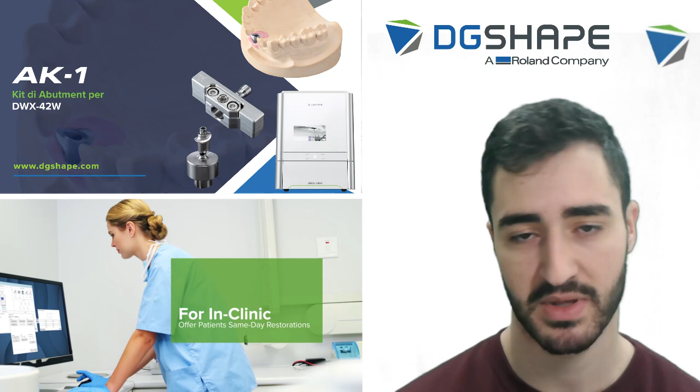Today we're going to talk about the AK1 adapter for Roland 42W, and in the future days, future months, we will show you some new webinars about small tips, about digital workflow, about the milling machines, software like Exocad or Millbox. We will show you some new protocols, new daily basis about digital workflow. Today we start AK1 for 42W, but in the future we'll show some new different videos about all the different kinds of aspects in the digital workflow.

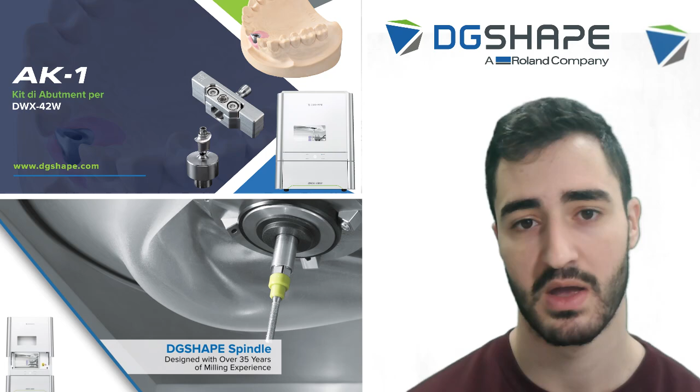Okay, so let's start with the first video today. We'll talk about AK1 for 42W. It's simply an adapter for milling custom abutments in your in-house machine, 42W. And you will see the simple workflow that we will use for adapting this new type of reconstructions to our milling machines that we can mill previously e.max crowns, Trilux materials with glass ceramic materials, for example. So let's start with the video.

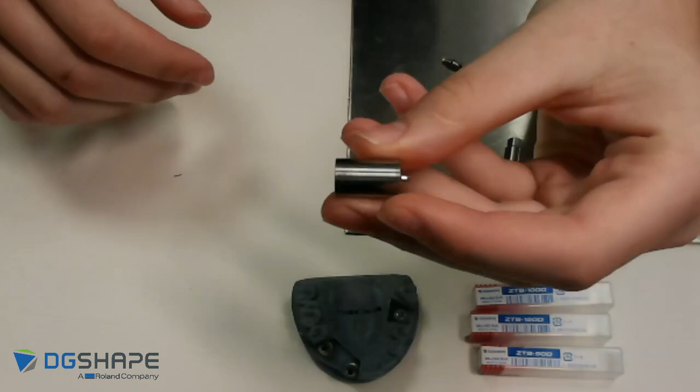First of all, I want to show you what are the pre-mills here with my camera. Pre-mills are simply this cylinder, as you can see, that you have the connection of the geometry of the implant already milled in this type of block. Which is the advantage of this? What are the good parts of this? That the connection is already milled from the factory, from the implant manufacturer. So the accuracy of precision of adjustment to the implant is perfect.

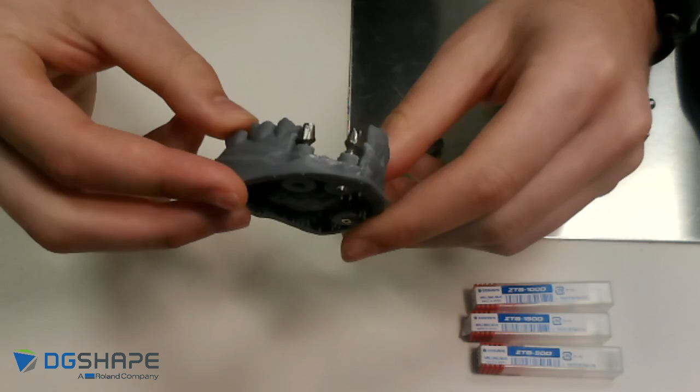So with this small machine like Roland 42W, we can mill only the blank, this cylinder, and have our custom abutment. And it will end more or less like this. As you can see more or less how it ends. So what are the advantages? That we can mill custom abutments in a very simple way, fast way, and afterwards we can have a better adjustment to the gingiva, better workflow. Okay?

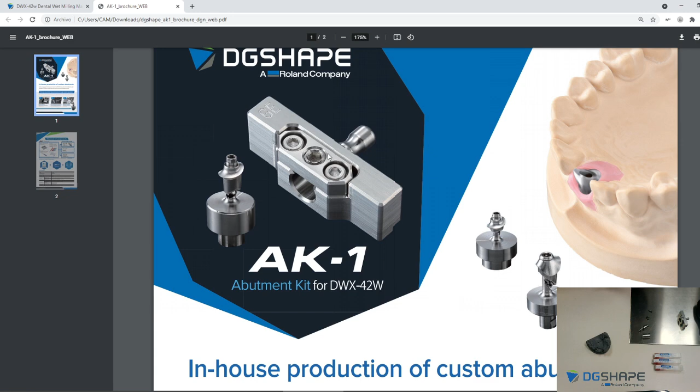We will see quickly a brochure of the Roland 42W. Here is in the web of DGSHAPE. You can go inside of it, search for DWX-42W. Here you can see some information, very simple. And you scroll down, you can come here down to the AK1 abutment. You can see some information, and then also in the brochure, here we can check it out together, so we can see more or less with some pictures what is the AK1. Simply is this type of connector that here goes the pre-milled, okay, and then you can mill your custom abutments.

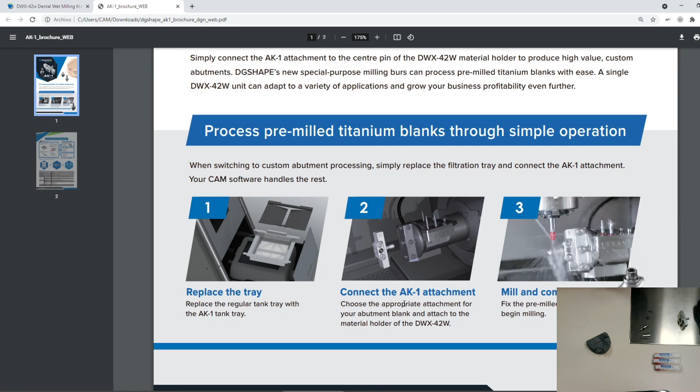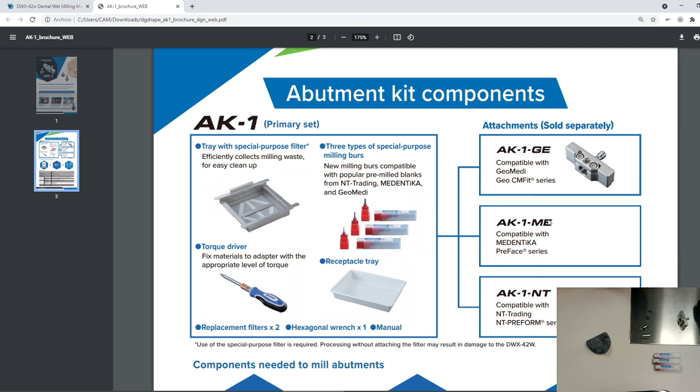3 steps, very simple. We have to replace the tray that we will show you afterwards in a small video, attach the AK1 attachment, and start milling. Very simple. There are some new milling burrs that are already introduced in the kit, that are the red ones. Okay, and that's it. Very, very simple. There are 3 types of attachments that are compatible with big implant connections, that are Geomedi, Medentika, and NT-Trading. Okay, that's it. Let's go and continue.

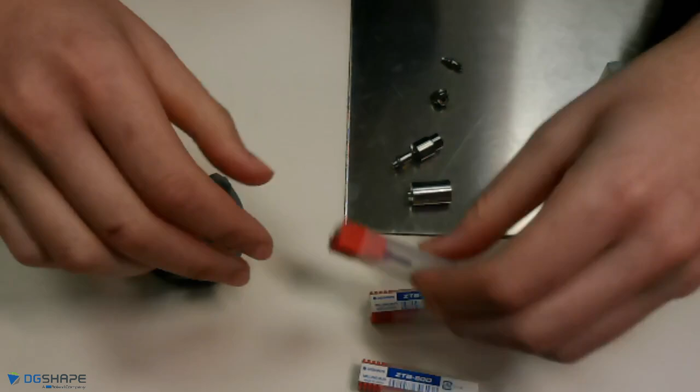We can see the new milling burrs, the new kit, 3 milling burrs that are very simple. As you can see, they are shorter milling burrs because for milling titanium there needs some more strength, and the shorter is the milling burr, the more resistant it will be. Okay, that's it.

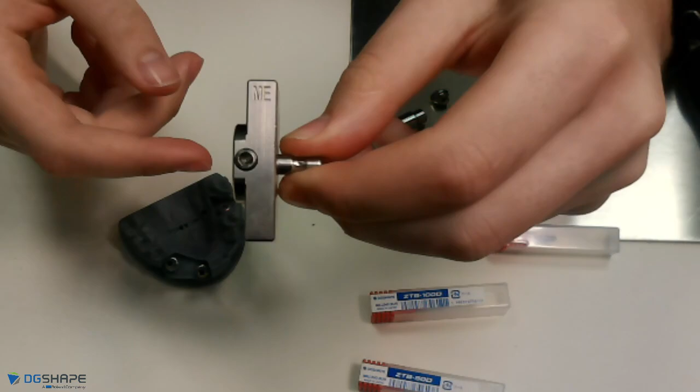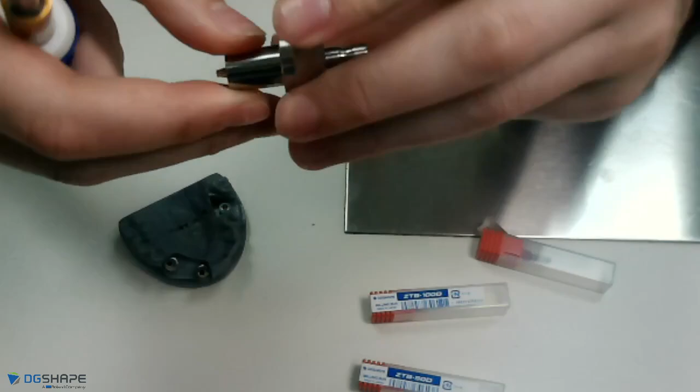And this will be the adapter, in this case, the Medentika adapter. How do you check it out? Very simple. There is like a rail in the abutment, also a rail in the attachment. Simply, as any other block, introduce it and screw it. Very simple. And now you mount it in the machine as a normal block of e.max or a block of glass ceramics. Okay, let's go and see a small video of the design.

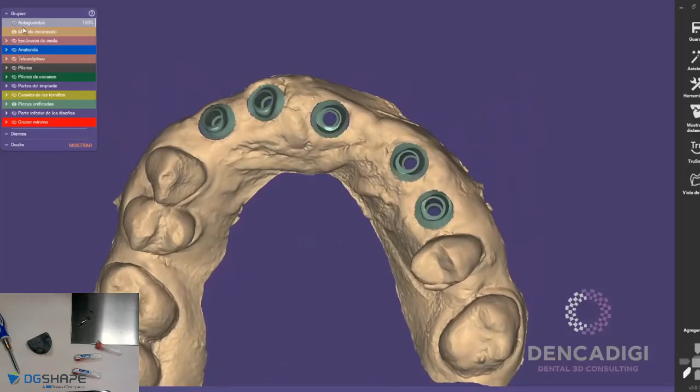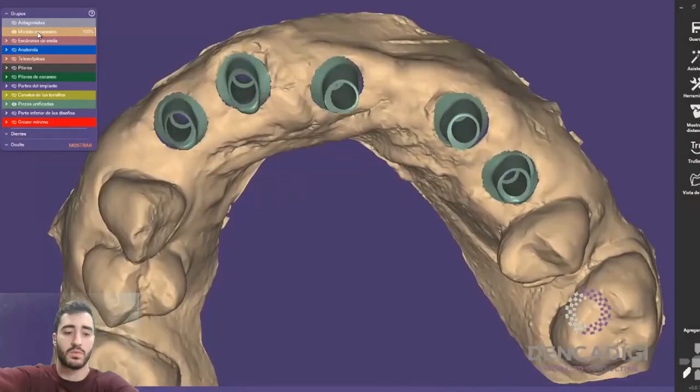This is a simple case that we mostly use this type of restorations that are for custom abutments, and on top of it we will do a bridge of zirconia in this case. What are the advantages about this type of restoration? That we have custom abutments, not a normal interface. So we control the gingiva and we control all the pressure we do on it. The design is not as complicated because it's very simple to do it with Exocad. Great workflow. Okay, let's go.

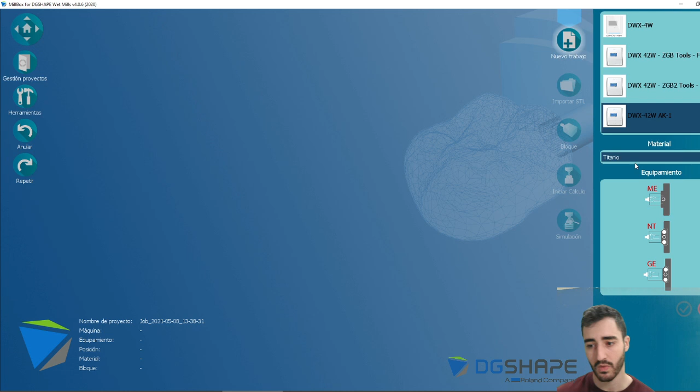When we do the design, then we go to Millbox and we have to mill one by one all the abutments. Okay, in this case, we use, as I said before, Millbox, a very simple software that I use in my daily basis. And when we purchase the abutment kit, simply we have to have an add-on in the Millbox software. Then will appear here in our first step, our AK1 adapter. Now we can select the material, titanium, and select the type of attachment. In this case, will be Medentika attachment. Click on it. Okay. Next step.

Already uploaded, and now we can select our abutment in this case. This is the case we did before, where there are 5 types of abutments. I have them all here. Select the first one, and because there's only one type of restoration we can mill, it's a pilar in this case in Spanish, a custom abutment, we import it.

Okay, now you will see it's very simple: the software asks me for a blank. In this case, we're going to use Bioner blanks, a company we work together with and have done some testing with, and we simply have to select the type of cylinder we're going to mill. You can see that inside the software there are a lot of compatibilities. There are a lot of implant systems that work together with pre-mills.

When you want to try a pre-mill protocol, you have to ask your implant connection if they have this availability of milling pre-mills. If they have it, you also have to ask if the scan body you're going to scan is compatible with your pre-mill, because everything is associated. The pre-mill blank is already inside the ExoCAD or 3Shape design. You have to check it out and make sure that your scan body and your library are compatible with your blank for milling. Okay?

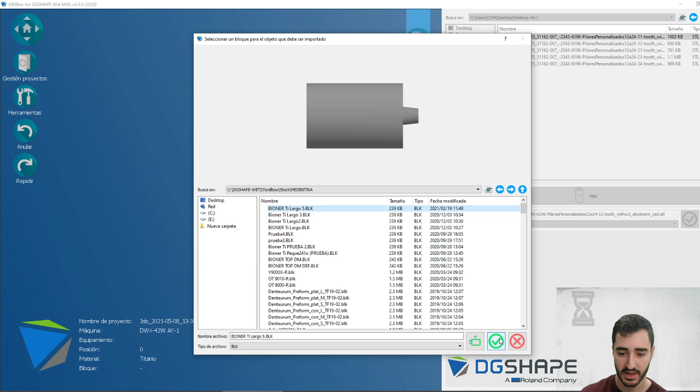We can also create new blanks with this button. We're not going to do it, but it's very simple. You just have to add the cylinder, the diameter of the cylinder, the length of the cylinder, and have the connection already designed. Okay, we import our blank and our cylinder, and now it will be very simple. Our design of the custom abutment will already be aligned with the blank.

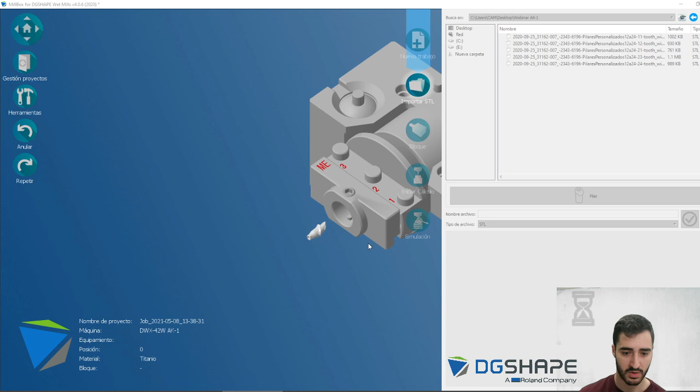And as you will see, in the protocol for designing custom abutments, the milling part, the CAM part, is the simplest of any type of restoration, because there's no way of moving anything. You can only modify the connector that we see right now. Okay, that's it, ready to mill.

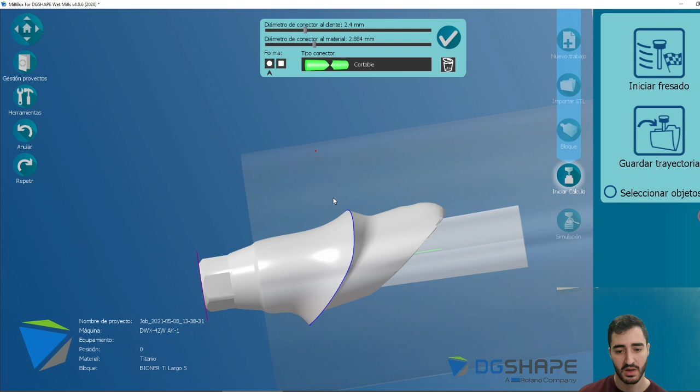The only thing we will change is here, our green connectors. As you can see, it's a little bit wider than the custom abutment. So simply by clicking on the connector, we can change the diameter very slightly, a little bit smaller, and now the diameter of the connector is the same as the abutment. If it were a little bit bigger, the problem would be that our abutment would not be as designed as we want. We'd have extra material here that we don't want, so simply reduce this diameter.

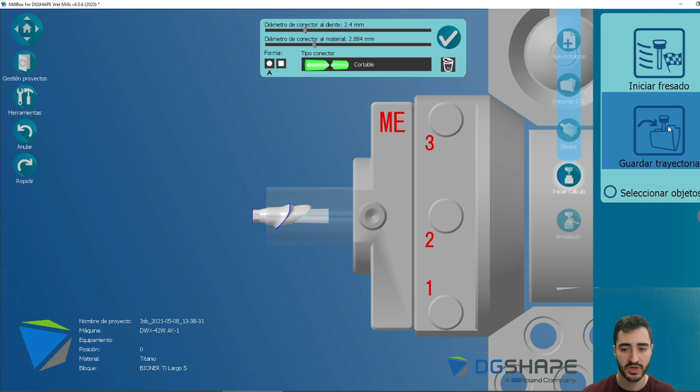Okay, we can see here that everything's connected, very well connected. You can see everything is okay, and that's it. That is our CAM protocol, very simple. We go to save the trajectory and go to milling. Okay, that's it, nothing difficult to do here.

Okay, so let's now see a small video of the whole protocol that we did before, because showing it on the camera is too difficult. We have a small video and I will comment on it. So this is the daily basis. We have our kit. We mount our attachment to our blank.

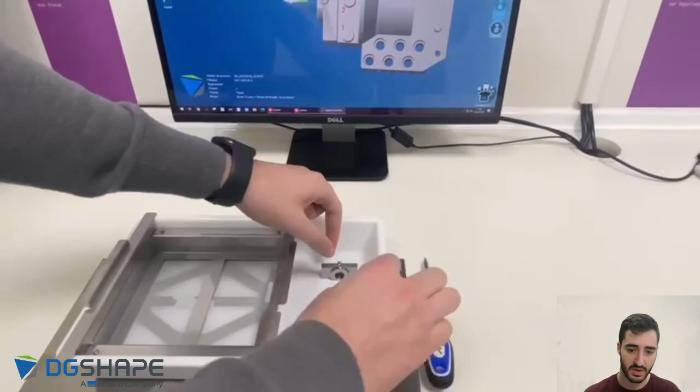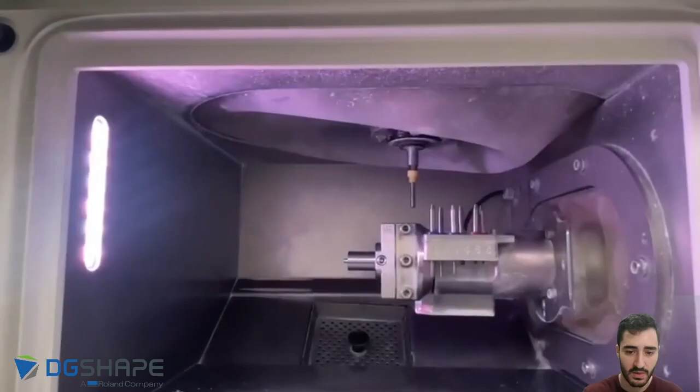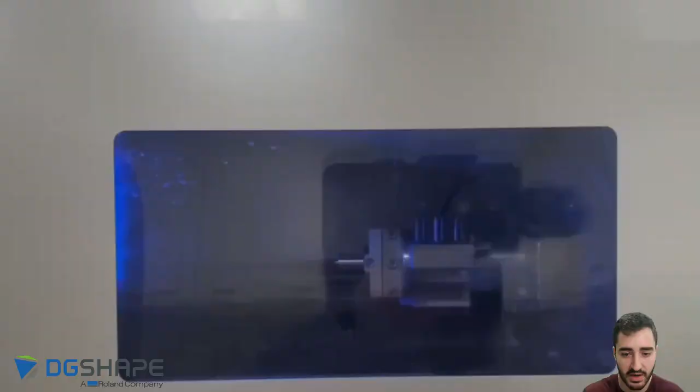We have the MillBox screen, and we will also change the tank here, as you will see, as well as the filters. Okay, we connect it, we screw it, and a simple pin, the same, and screw. Very simple. Now we will change our filters. Okay, the normal filter for glass ceramics, we change it, and that's it. That's the daily basis protocol. Very simple. This filter is new, it's different, so the metal that comes out of the blank doesn't get into the circuits of the machine.

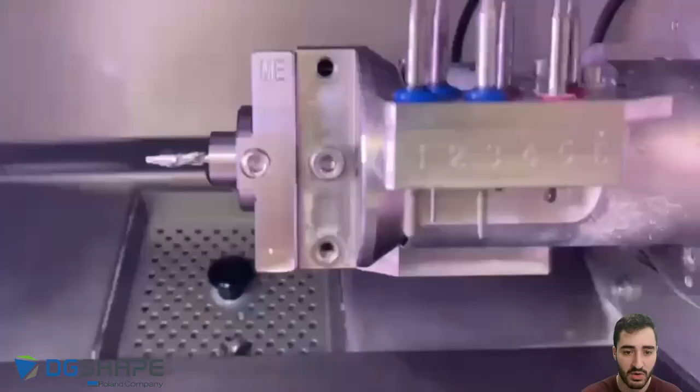Okay, here we can see that the 3 milling burrs are compatible with the 6 blanks, so we don't have to change any burr manually. And that's it. Now it starts milling. More or less 30 minutes per blank, depending on the width of the design. And for me, the best part is that the finishing the machine does is almost polished. As you can see here, it's very, very polished. So our after work will be none. After the blank is milled, our custom abutment, we only have to cut it, and it's ready to cement.